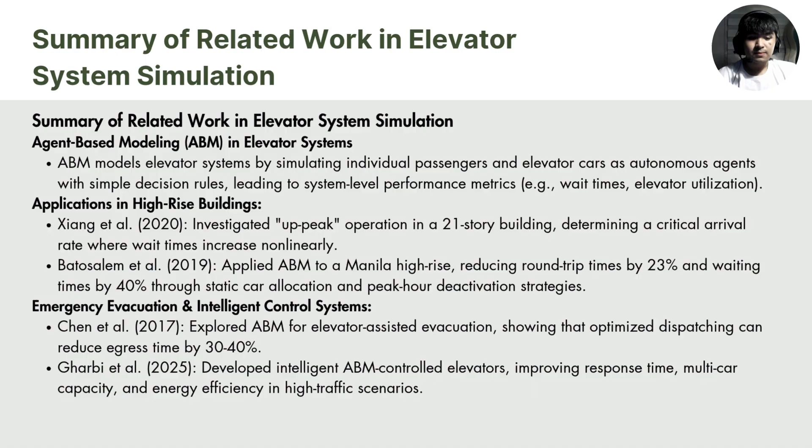Beyond routine operations, ABM has been used for emergency evacuation planning, as shown by Chen et al.'s research, who demonstrated optimized dispatching could reduce egress by 30 to 40%. More recently, Gharbi et al.'s research developed intelligent ABM-controlled elevators, showing improvements in response time, multi-car capacity, and even energy efficiency during high-traffic scenarios.

While this body of work is extensive, we have identified crucial gaps in existing research that our study aims to address. Firstly, there's limited focus on mixed-user academic settings, while most studies concentrate on commercial high-rise offices or emergency scenarios, rather than the unique role-based elevator allocation found in universities. Secondly, the existing models often overlook variable demand conditions specific to academic schedules like fluctuating class times and intense peak traffic hours, which profoundly affect elevator performance.

Lastly, there is insufficient attention to real-world floor configurations and access restrictions. Few models fully account for role-specific access to elevators and specific floor layouts, which are critical in environments like Mapua University. These gaps directly led to our justification for choosing an agent-based modeling approach. ABM is tailored to real-world dynamics. It excels at capturing the complex, heterogeneous behavior of individual passengers, including their varying arrival times, destinations, and even patience levels, reflecting the true variability in elevator usage.

It's highly suitable for mixed-use environments. Our ABM model can precisely simulate the role-based elevator allocation at Mapua, students, professors, and staff, primarily, and account for specific access restrictions like those to basement floors. By simulating Mapua Makati campus's configuration, our study directly addresses the key gaps in integration of real-world elevator allocation, user-specific behaviors, and time-sensitive demands to comprehensively evaluate system performance.

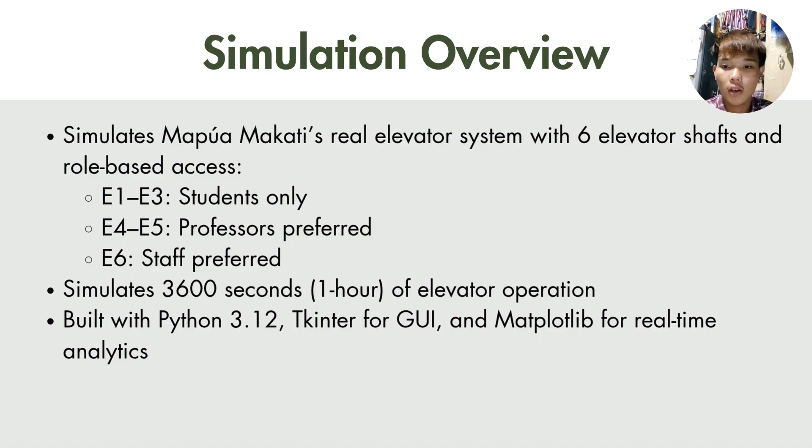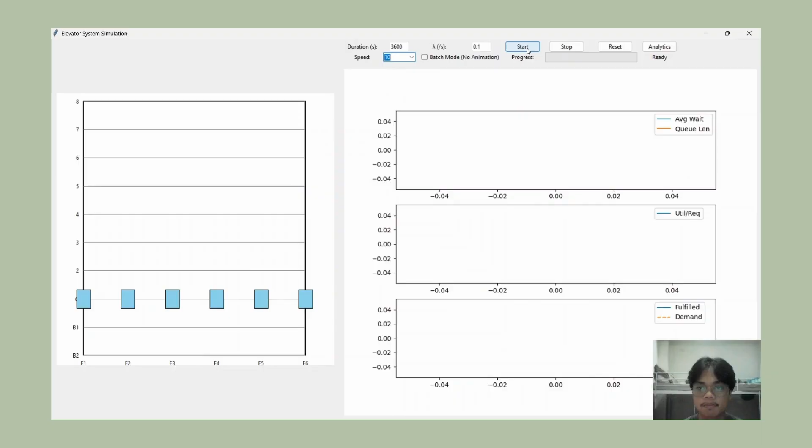So now let us try to simulate for just a moment. As we can see, we have here our elevators moving. The green represents the students, the red one represents the staff, and the blue one represents the teacher. So in these 3 elevators, there is still a possibility where teachers and staff can actually ride this elevator.

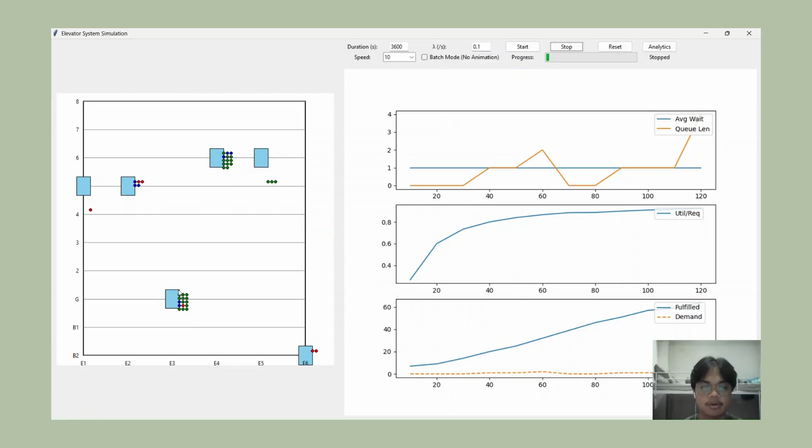So stop. Let's now proceed to our analytics. We have here our average wait time over queue length, the second graph is for the elevator utilization, and next is the fulfilled and demand graph. So we have here our analytics.

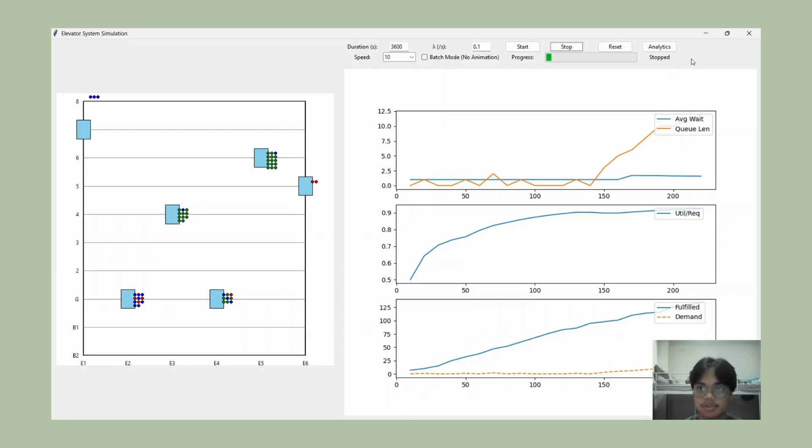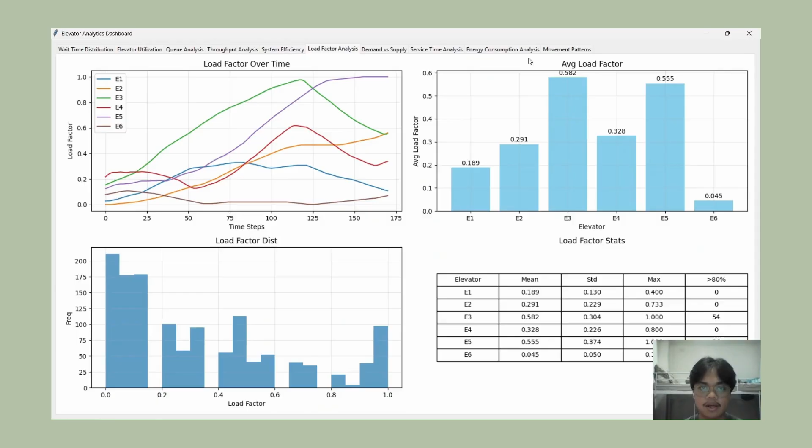We have the wait time distribution, elevator utilization, the queue analysis, the throughput analysis, system efficiency, load factor analysis, demand versus supply of the elevators, service time analysis, energy consumption analysis, and movement patterns of the elevator. So that's all for our simulation.

So moving on, we have our results and discussion. Here we summarize our key findings on system responsiveness, role-based wait disparities, elevator utilization and throughput patterns, and model validation against campus observations. Details of each figure will follow. So let's start with figure 5.1.

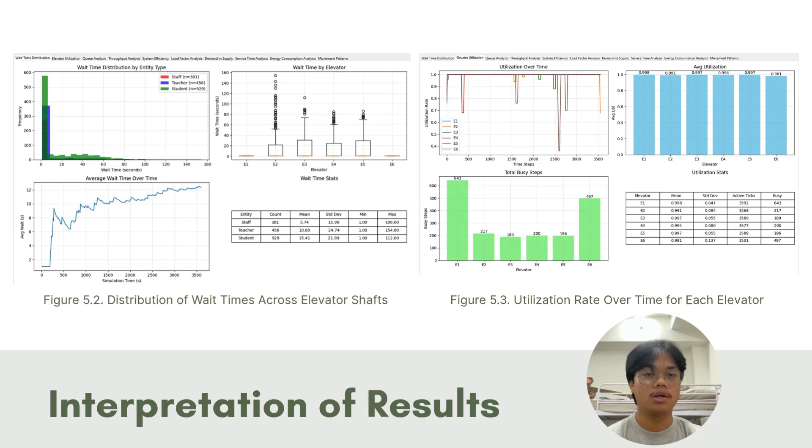This shows that all 6 elevators maintain utilization rates near 1 over the 3,600 second run, dipping only briefly on E6 and E2 with average utilizations of 0.981 and 0.991. Busy step counts revealed that E1 and E6 shoulder most of the workload, while E2 to E5 each record under 217 busy ticks. The accompanying table confirms these high efficiencies alongside the uneven distribution of service load.

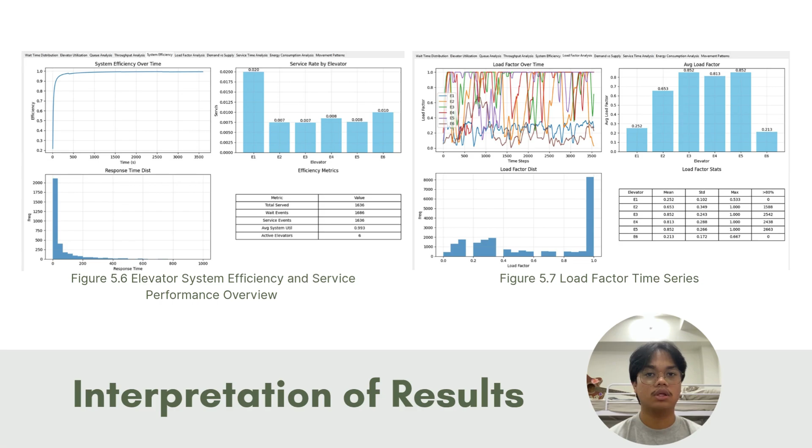The distribution shows most time steps at zero load for E1 and E6 and peaks at full load for E3 to E5, and the statistics table confirms zero instances above 80% on E1 and E6 versus 1,588 to 2,663 such instances on E2 to E5.

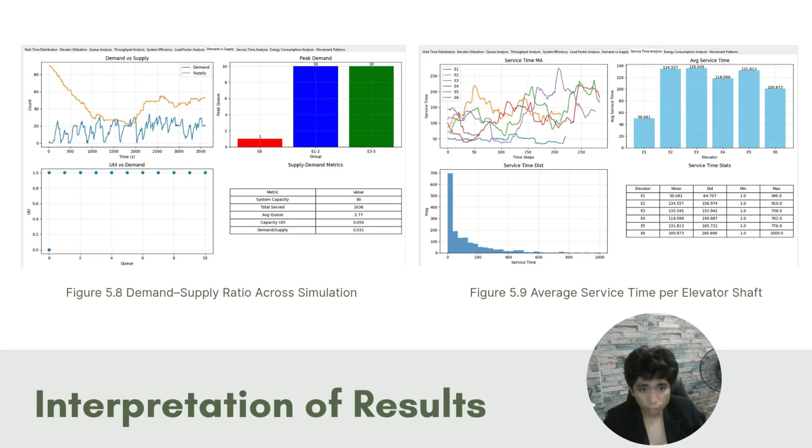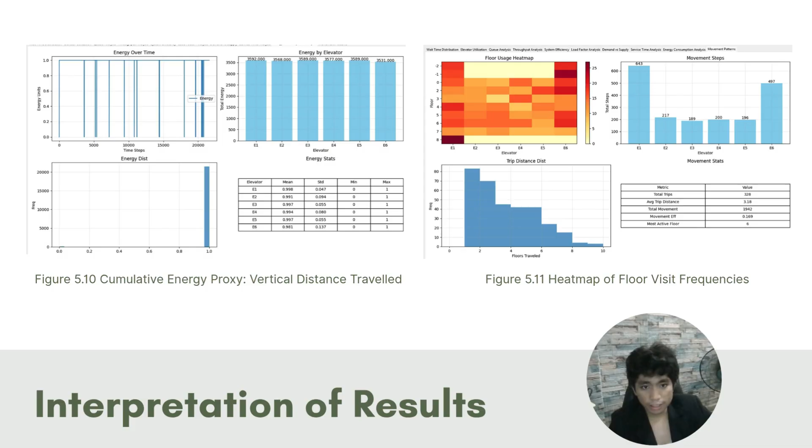Now that we have interpreted all our graphs, we move on to section 5.2, our sensitivity analysis, where we calculate how the system behaves under varying passenger arrival. In this section, we examined how changes in the passenger arrival rate, noted as lambda, affect system performance. We tested three demand scenarios: light, lambda equals 0.05; baseline, lambda equals 0.10; and heavy, lambda equals 0.25, while keeping all other parameters constant.

And our results showed that passenger throughput increases nearly linearly with lambda, even under heavy load. The system maintained over 99% utilization, indicating high efficiency. However, wait times did not scale linearly. The student mean wait times tripled from light to baseline traffic and increased further under heavy load. Queue dynamics also became more unequal.

Under baseline, professor car elevator 5 had the longest queues, but under heavy load, congestion shifted to student and overflow cars, elevator 3 and elevator 4. Despite this, staff car elevator 6 remained largely underused. Finally, we noticed a service imbalance. Elevator 3 to elevator 5 handled over 60% of trips under heavy traffic, while elevator 1 and 2 stayed relatively idle. This shows that role-based access, though effective, can cause load clustering in central shafts.

These results suggest a critical lambda threshold near 0.10 where fairness breaks down. To fix this, we recommend temporarily allowing students onto staff or professor elevators during peak hours and improving the dispatch logic to account for lobby congestion rather than just nearest car rules. Now moving on to section 5.3, which is the comparison of gathered outcomes with benchmarks.